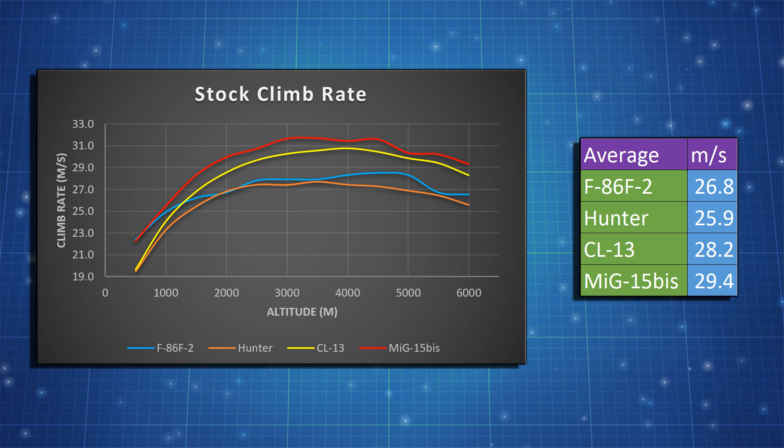In terms of performance, this aircraft is a bit underwhelming. Since the Hunter is such a heavy aircraft compared to its peers, its climb rate is naturally one of the worst, especially when fresh out of research. Don't expect to face your enemies on even altitude. A full upgrade amends this problem somewhat, but unless you're facing F-86 F2s, you won't outclimb anything.

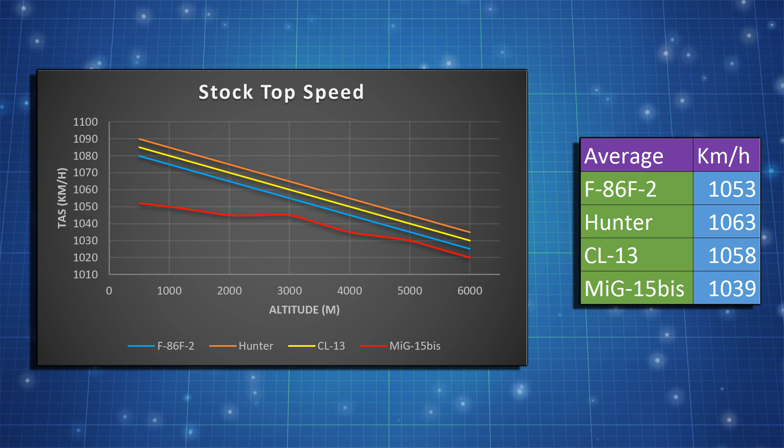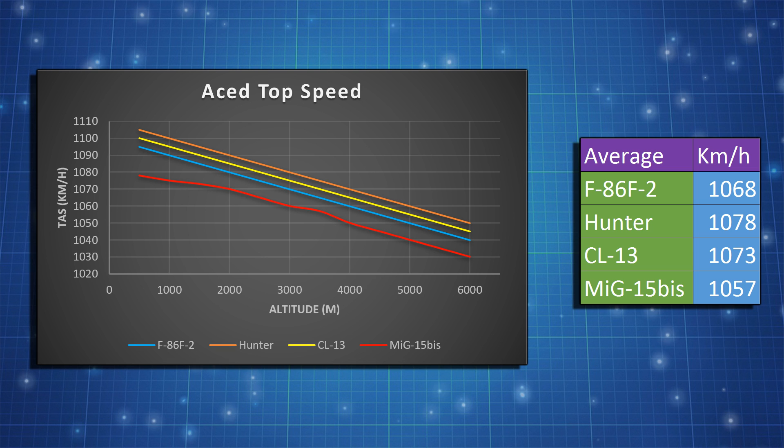Top speed is one of the aces of this aircraft. The Hunter is able to outrun anything in level flight and similar level of upgrade. Be mindful of CL-13s however, as an upgraded one can easily catch you, and even when both you and your opponent are aced, your speed advantage is negligible.

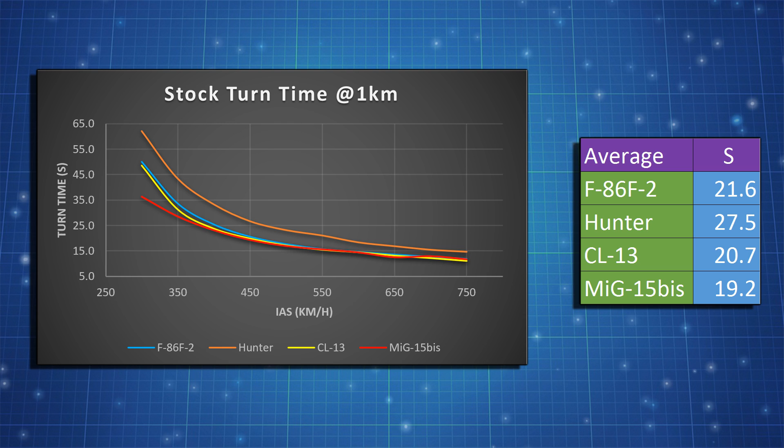The turning time of the Hunter is, as expected, rather bad. Neither stock nor upgraded should you ever attempt to turn fight anything. Ever. You may be able to lure an F2 into breaking its wings at high speeds, but don't count on them having boosters installed. The roll rate is somewhat mediocre. It's not quite as bad as the MiGs, but you can't roll with the Sabres either. In a pinch, you can roll out of the way of a diving enemy, but if they're catching up to you, you're doing it wrong.

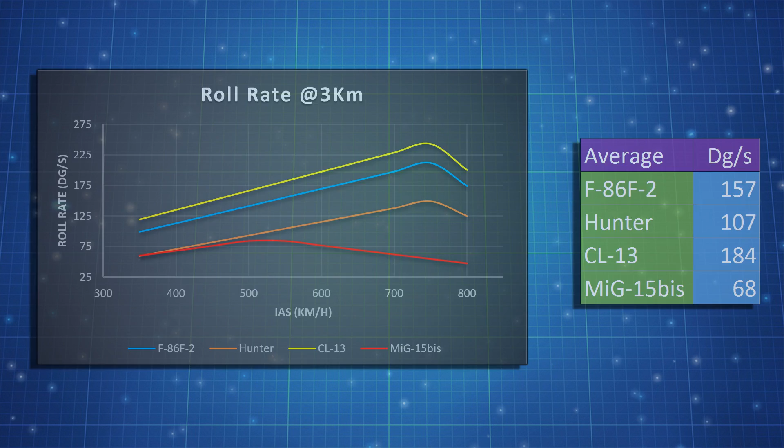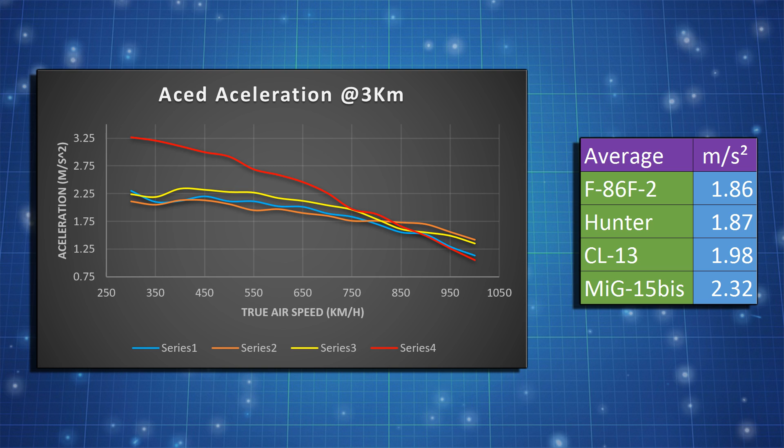Sadly, the acceleration of this aircraft is rather bad as well. At anything below 800 km/h true airspeed, you will struggle to reach your top speed before the enemy does. However, once you reach 800 km/h, you do actually accelerate just a tiny bit faster than anything else, giving you that edge in high speeds.

The armament of this aircraft is what really makes it stand out from its competitors. The four 30mm Aden cannons fire 1,300 rounds per minute each, have a muzzle velocity of 790 meters per second, and carry a total of 600 high explosive incendiary tracer, high explosive fragmentation incendiary and/or armor piercing shells. The resulting 20.84 kg per second burst mass is the highest in the game, and is sure to make short work of any unfortunate soul caught in your aim.

There really is no use to carry anything but the air target belt, as the AP penetration of a mere 30mm at 500 meters range is not quite enough to deal with tanks in an effective manner.

As long as you don't have new boosters installed, you won't break your wings turning at any speed. Installing boosters will make you turn and roll a bit faster, at the expense of breaking your wings in a full turn at 900 km/h. Since the Hunter was never meant to be a turn fighter, installing new boosters is not recommended.

As for stall speeds, this aircraft needs more speed to keep it in the air than any of its competitors. At 230 km/h indicated airspeed with landing flaps and 250 km/h without, you'll need to get used to higher speed landings than you're used to. At least the flaps and gear are quite resistant to compensate for that. 450 km/h and 500 km/h are the speeds at which you'll risk breaking your landing flaps and gear respectively.

Whilst it is very unlikely of ever happening, you can break your wings in a dive at 1,200 to 1,300 km/h. But you'll need to dive straight down from around 8 km altitude to ever achieve such speeds.